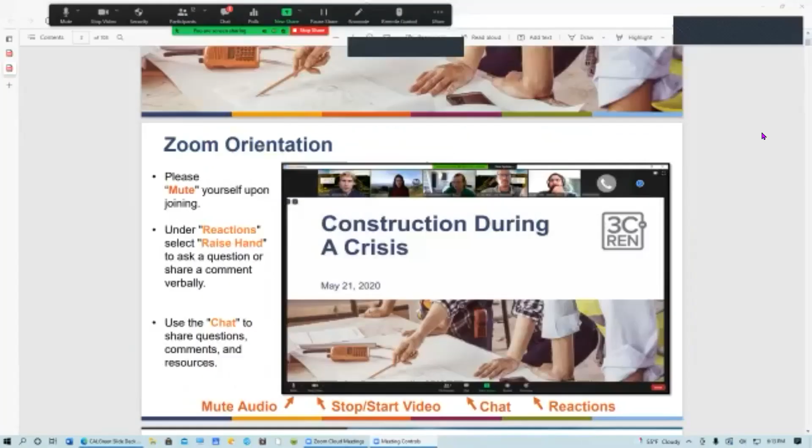So this is a slideshow like we've been looking at. 3C REN does this one also, and it's not very long. We may not look at much of it, but next semester a lot of this stuff's more relevant. Green building has building performance in it, but not everything uses building performance or building science. Some of the green buildings have other things in it.

What I want to do is show you this slide, Title 24. Title 24 is just a legislative number or title for a bill that was passed, so they just call it 24 to keep track of it. It's the building code, so whenever someone says Title 24, they really just mean the California Building Code. It's got 12 parts to it.

It's got an administrative code, which only a total masochist would read. It's got the building code, which is where you find out your stair-step riser limits and everything to do with building. It's got an electrical code for the electricians, everything to do with electrical. HVAC would be in mechanical code, plumbing code, and then they've always had an energy code.

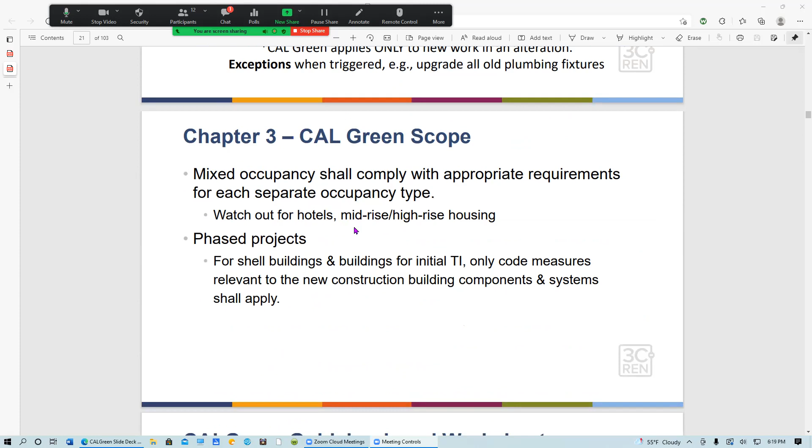They have a lot of things. The government's obsessed with trying to get everybody to understand this. One way they could help is to write decent code books, which they've never been able to do. But they try to make up for that by having all these reference things, like we looked at some for the... what do you call it... air changes, right? Minimum ventilation values. Yeah.

So, okay, why am I echoing in there? Is somebody not muted and it's playing through their speakers? Might be me. Sorry, okay.

So in this part 11 of the code on green building, they have planning and design. We'll just run through this real quick because I'm going to take more time with this next semester. They have energy efficiency, obviously, but they also have water efficiency, right? Because in California, that's a huge issue.

And then they have material conservation and resource efficiency, which is also a great thing to have. And then they have environmental quality, which is indoor and outdoor air quality mostly, but it could be water quality too. So this slideshow kind of tells you what's in each of these chapters or divisions.

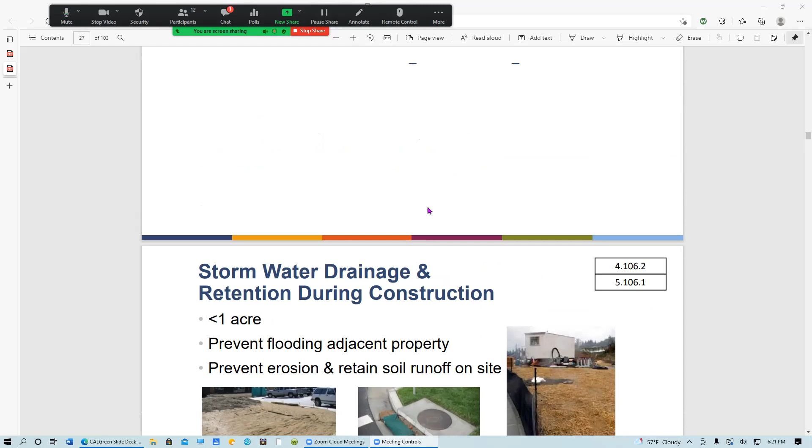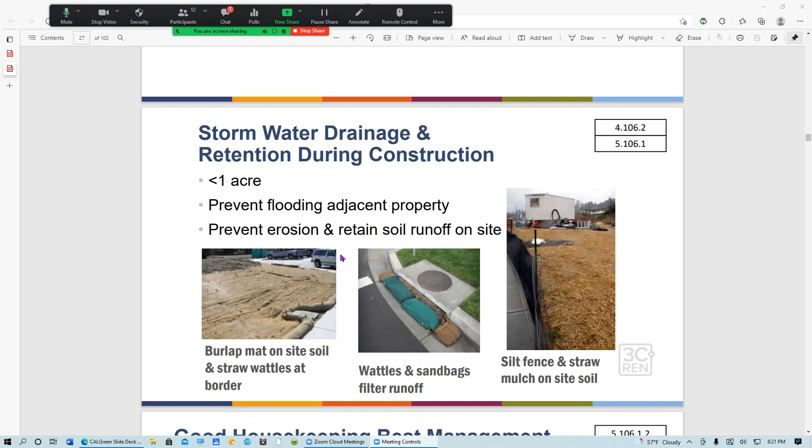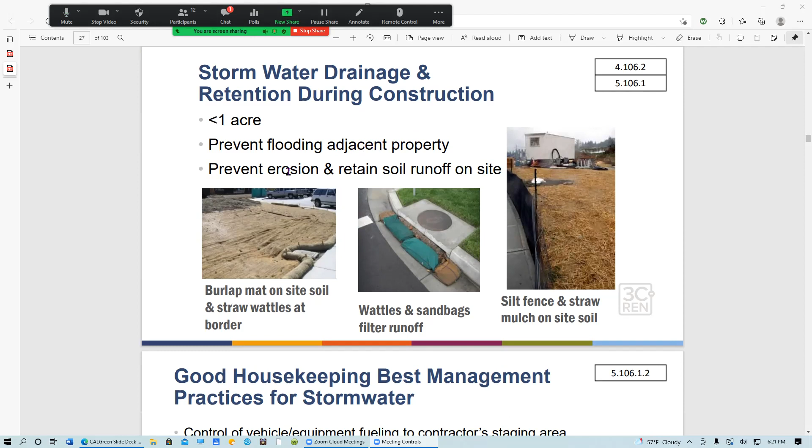Planning and design is just talking about best practices, things like stormwater drainage and retention during construction. Now, we've talked about that in this class minimally. We had a water management unit that we did. And the place you'd go to find out the government restrictions on that, and how they want you to manage water - first of all, we don't have a lot of water, so they don't want you to let it just go everywhere.

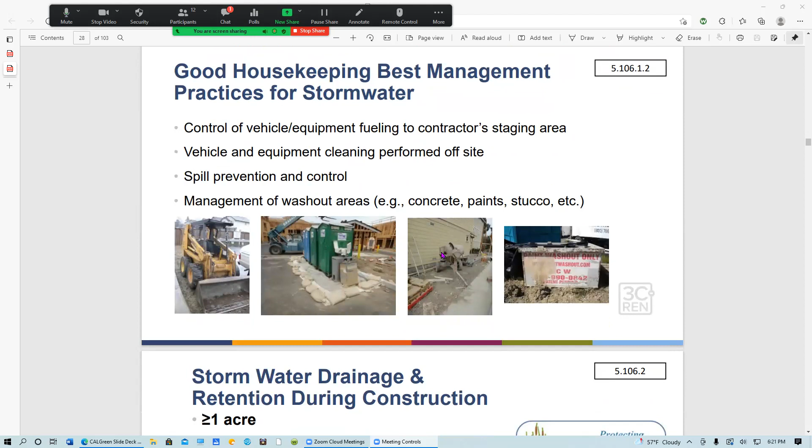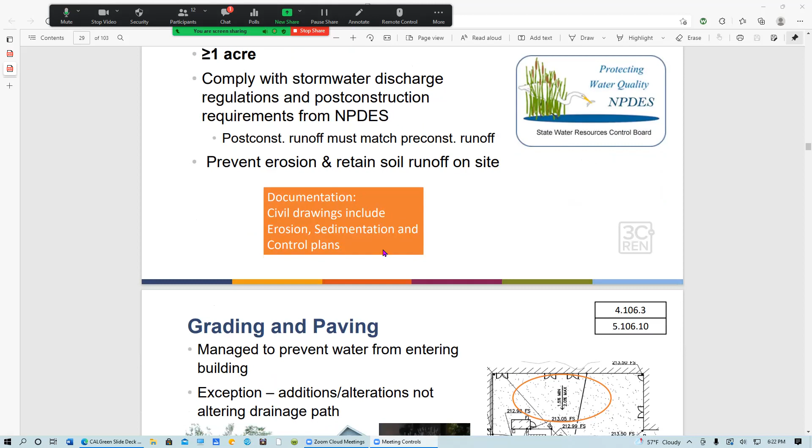And then they want you to prevent erosion, obviously, so they have things for that. We won't go into the details, I'm just giving you an overview here. Stormwater practices for dealing with stormwater, stormwater during construction, that's an interesting thing. And there's temporary things you need to do if you live in an area that's going to rain, and construction takes months, sometimes years to do.

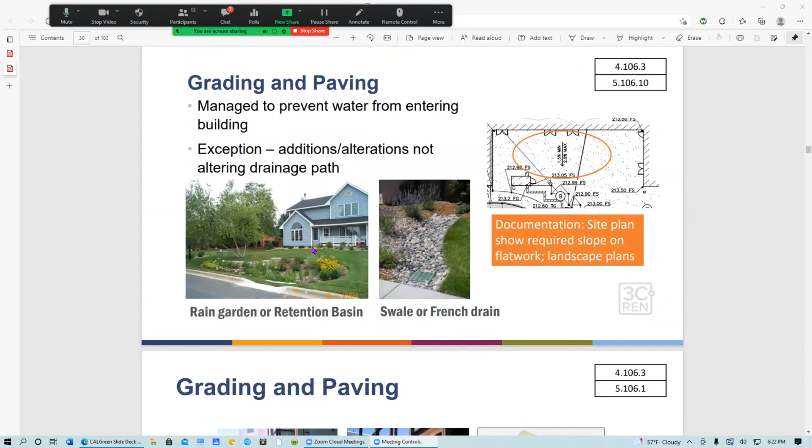So you want to make sure you're prepared when the heavy rain season comes in your area. Grading and paving - like wattles? Yeah, like wattles and all kinds of stuff, temporary swales, sandbags, all kinds of stuff. These are more permanent structures to have in your yards. And we've talked about this a little bit, rain gardens and swales and French drains. And then there's, of course, grading and paving. There's things to know about.

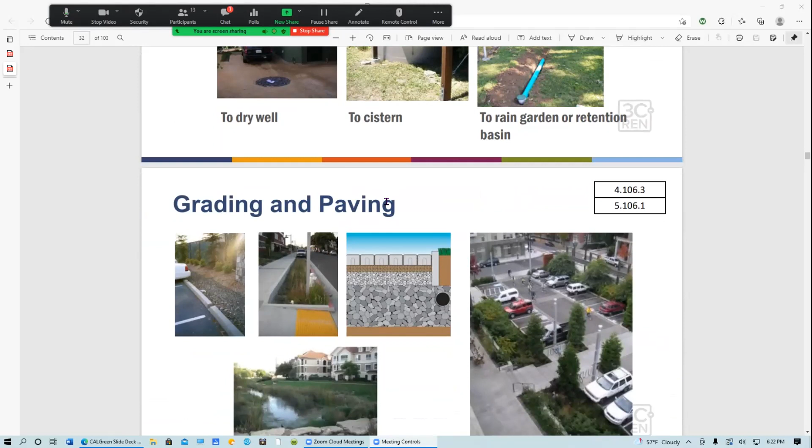So conserving water - a lot of grading and paving now is to conserve water, get it down to the water table.

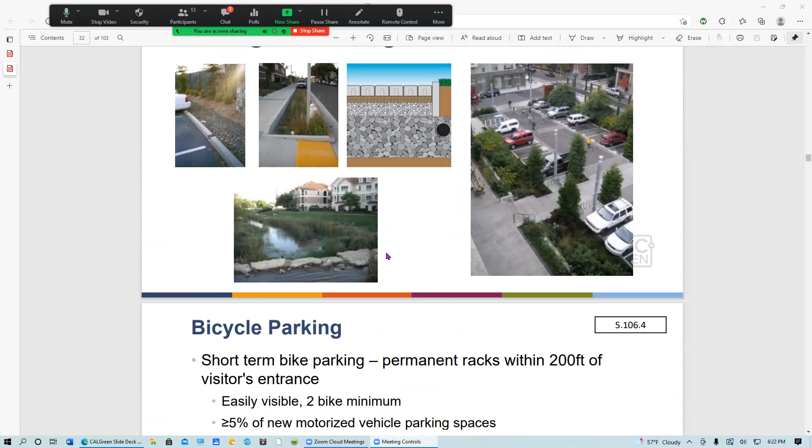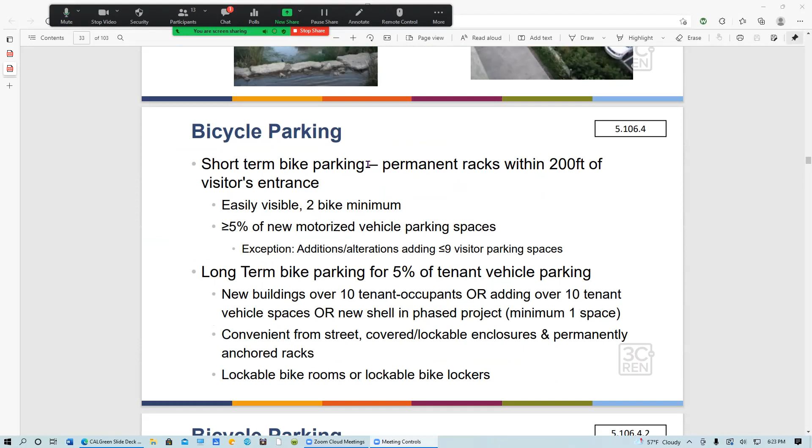Bicycle parking, there's a new category, huh? So there actually are laws about bike parking, because we're trying to promote bicycle riding. So if you don't have places where people can lock up and protect their bikes, they won't do it.

So the county, across from the courthouse there where the county building is, they have a screened-in area, it's like 15 feet high, and it's got wire fencing on all sides, and every county person has a key, or it goes back and forth between combination and key, and they can go in there and park their bike. Because my electric bike, for instance, is pretty expensive, and I don't want someone ripping it off, so I wouldn't ride it to work unless I could be certain it was secure. When I taught at UCSB and rode it, I'd bring it into my office, down the hallway and into my office.

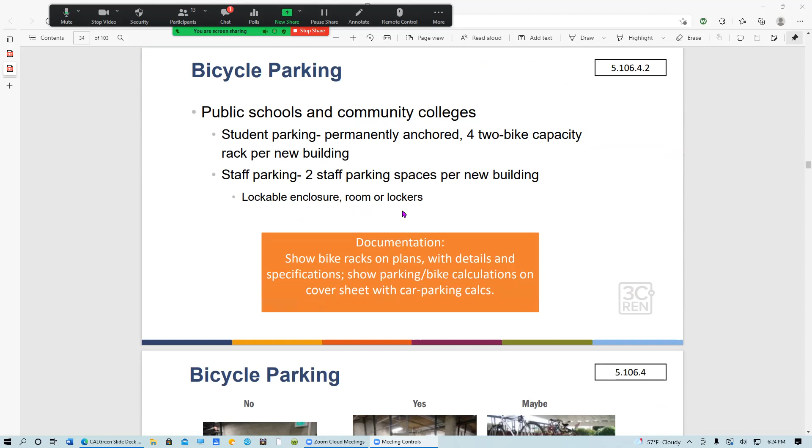But now they're saying you have to actually have places for people, so that's great, so they have to have parking. Santa Barbara City College has parking, and they even have fix-it shops, little sheds to help you if your bike gets broken. So here's kind of a screened-in thing like I have at the county. They have racks that have locks on them.

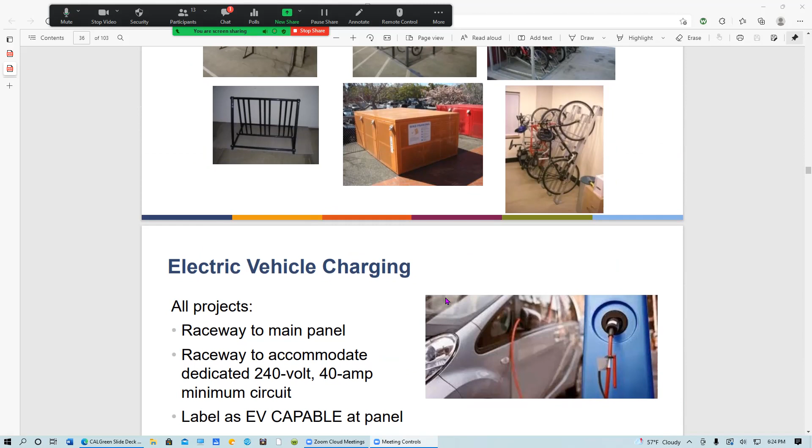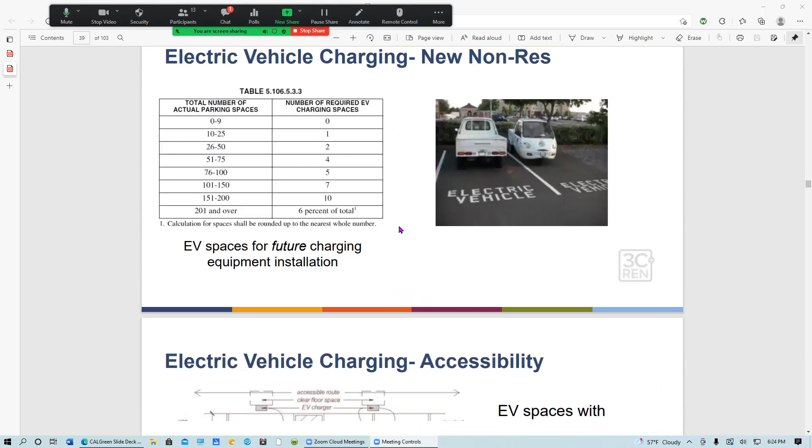So that's important, and same with electric vehicle charging. We're trying to encourage people to ride bikes for many reasons, but vehicles are to cut down on fossil fuels, so we've got to make sure we have a lot of these EV charging things. So this is the kind of thing that's in that green, CalGreen section of the code.

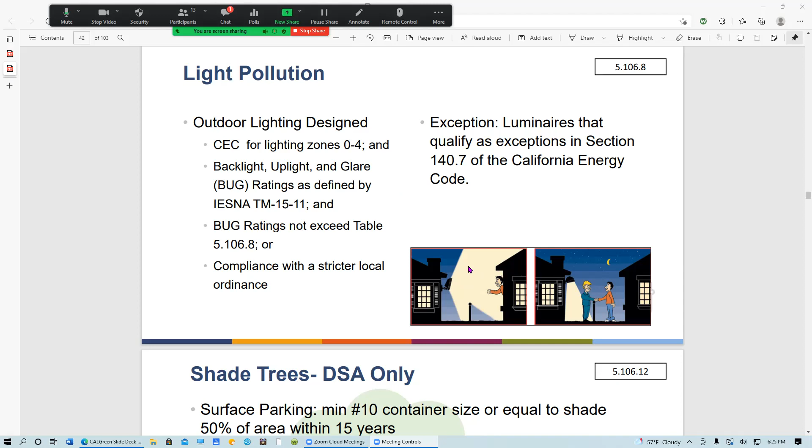So energy efficiency must comply with Part 6. So that's what they have to say about that, which is what I thought - why duplicate it? But water efficiency is a good thing.

So you guys will have this slideshow on this recording. You might want to keep some of those recordings that have fact sheets, information on them, because if you want to get the current code requirements for water and things, this is a really concise way to find that stuff - much better than the code.

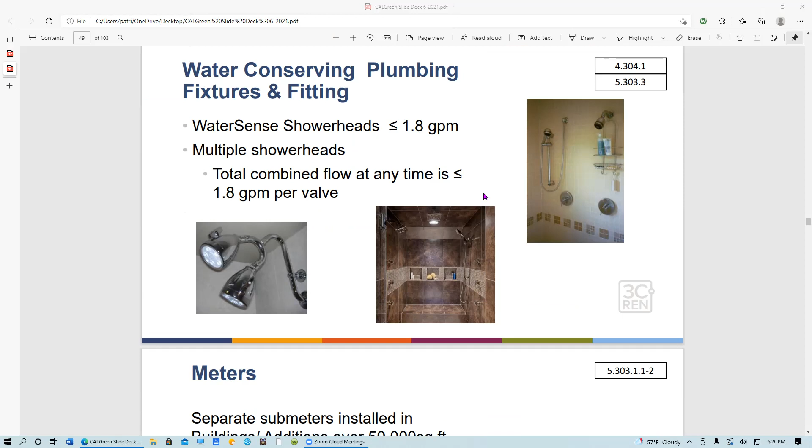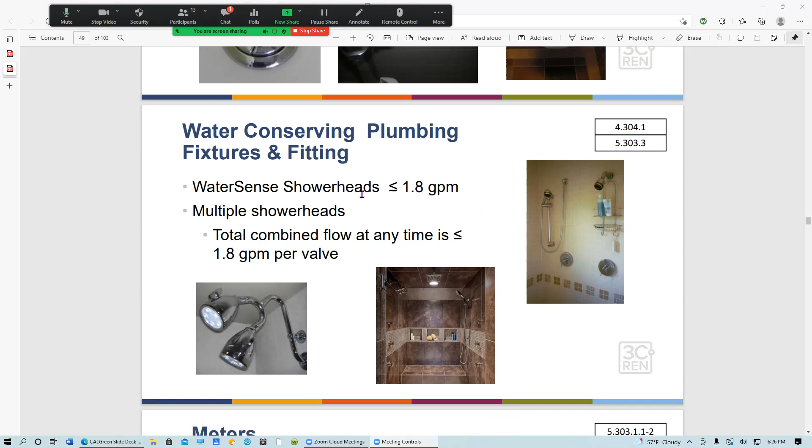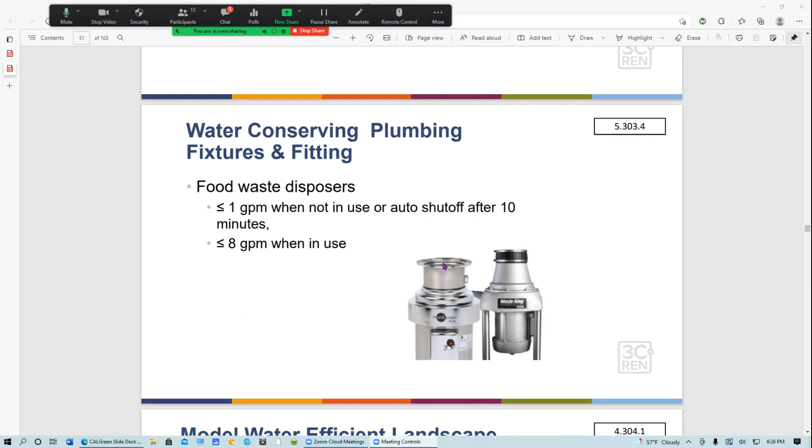Yeah, the 3C-REN group has done a lot of work, but they're actually boring to listen to because they go on and you don't want to know a lot about every area. With a slideshow, you can just whip through things and not get overwhelmed looking for what you want. Look at this, interesting - they have guidelines for food waste disposers. They have to have an auto shut off after 10 minutes, otherwise they'll burn the engine, maybe cause a fire.

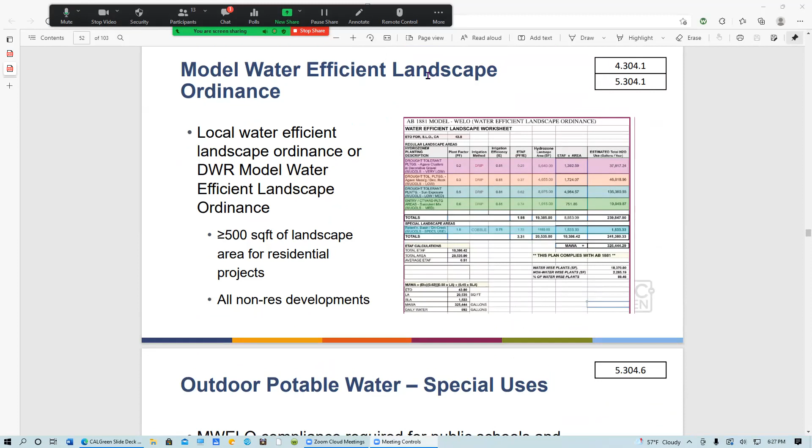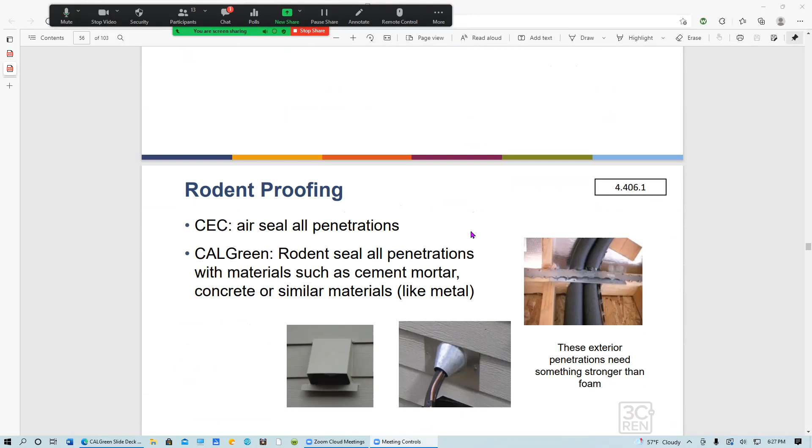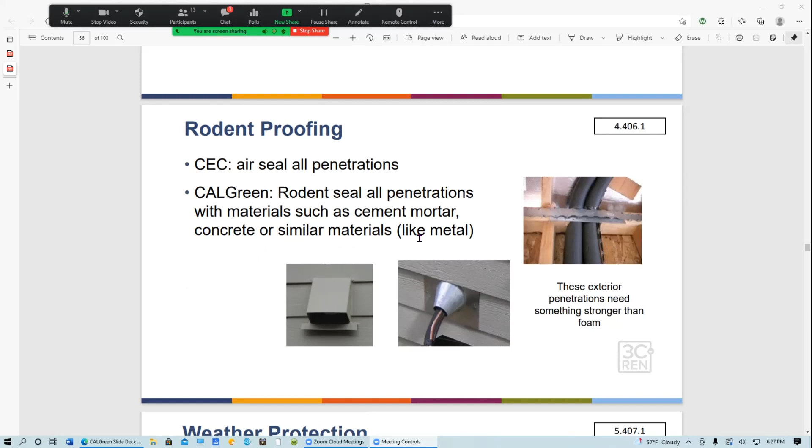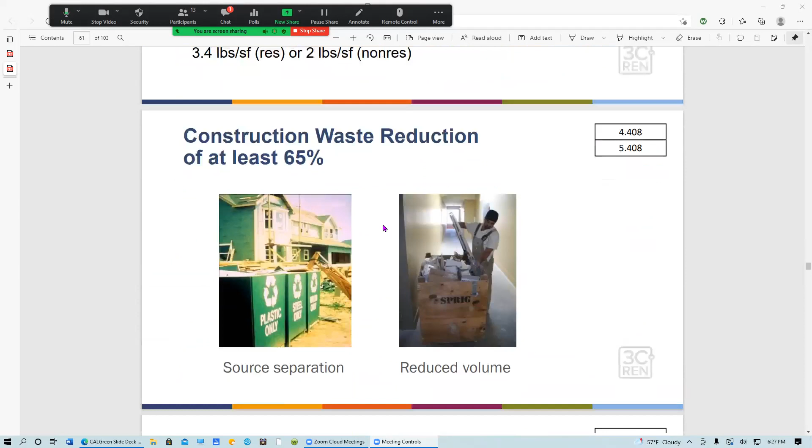So, model water efficient landscape ordinance - outdoor potable water, recycled water. Okay, resource efficiency. Well, that's funny - material conservation and resource. So are they considering rodents a resource to be protected? No, it's what the rodents eat, right? So weather protection, moisture control, construction waste - at least 65%.

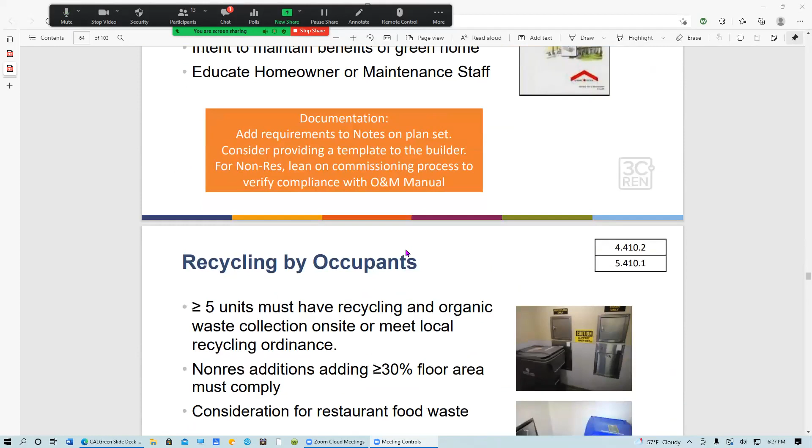Operation and maintenance manual. At final inspection of a house now, you have to have a homeowner's maintenance and operation manual, because we've got so much building science, building performance equipment in houses now, that if you sell a house, the next person has to know how to deal with all that stuff. So you have to have a manual, and it has to have at least 10 subjects, because otherwise you lose these green home benefits. Like a car or truck manual, but for a house.

Yeah, exactly. And I've felt all along for the last 10 years they've recommended that people should build a room or a separate section in their house - there's a lot of stuff in a house people have now. We've got a lot more electronics than we used to, and there could be quirky things about the electrical system. How many times have you gone into your electrical panel in the garage and seen something marked for bedroom, turned it off, and it turns off the kitchen instead? So there's just a lot of things to keep track of.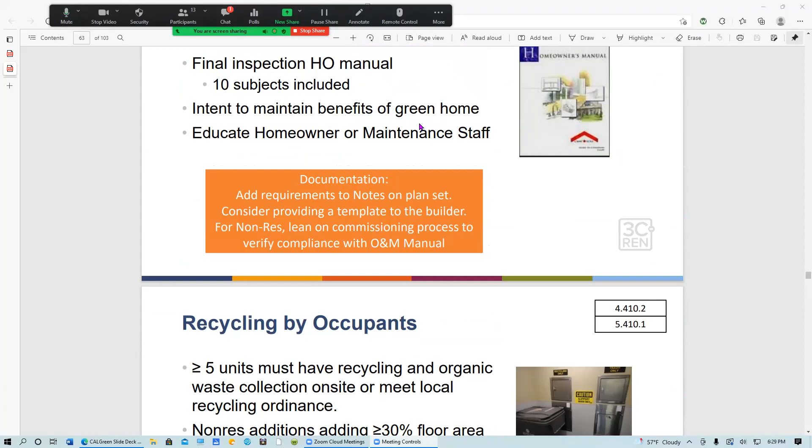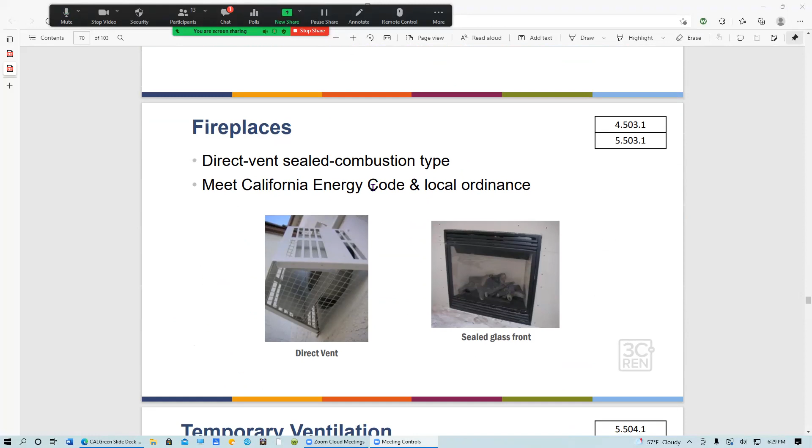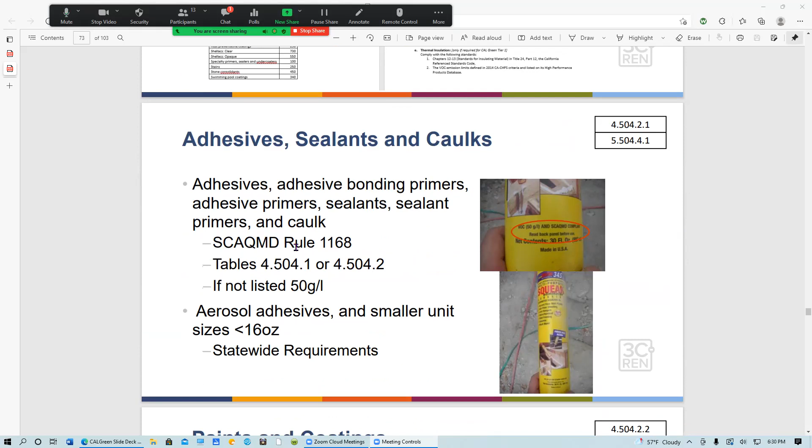Recycling, environmental quality. Oh yeah, okay. So this is like combustion air. Yeah, adhesives - this is like VOCs. And a list of the minimum requirements for maximum VOC and toxins and various things.

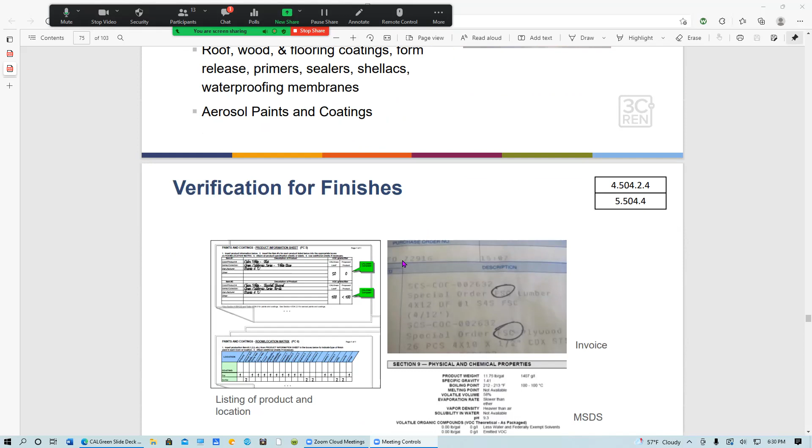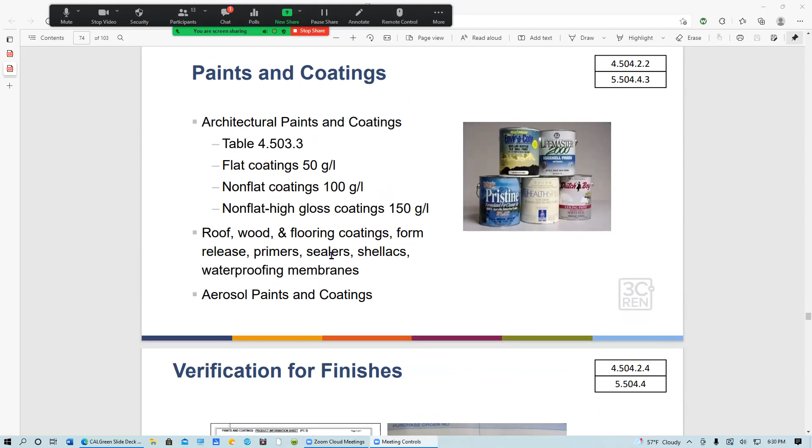Carpets - they got regulations on carpets. It used to be they made carpets with the cheapest materials, so they'd have cheap carpets because a lot of people can't afford expensive carpets. This was when everybody was using carpets. But the poor people who couldn't afford good carpets had to breathe all that - what's the stuff? Come on, you guys, help me out. The stuff that's in carpets, it's got to be listed here somewhere.

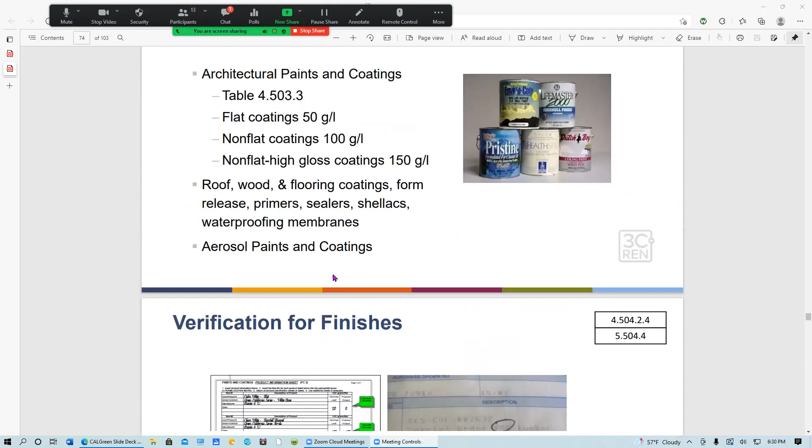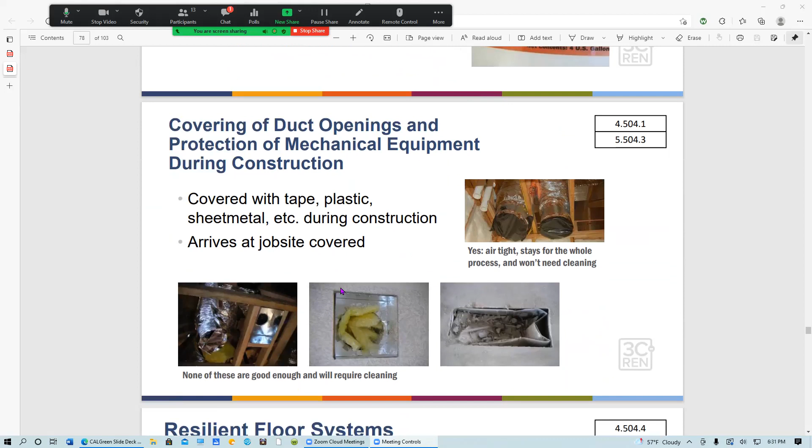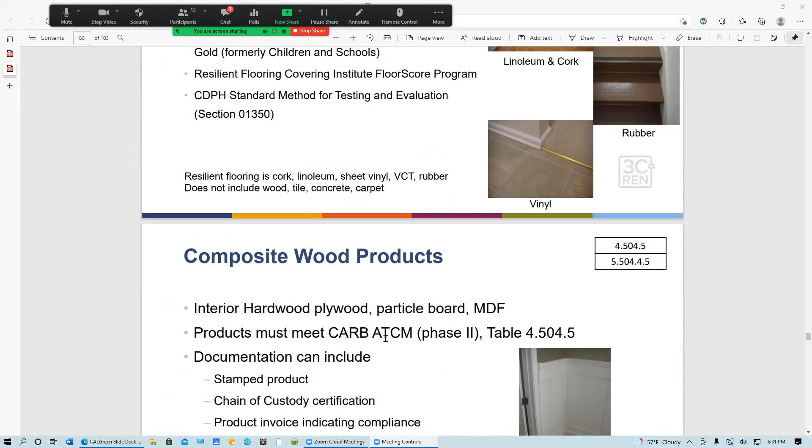It ends in like azine or something. No, it's... I'm just drawing a blank. It'll come to me in a second. It should be listed on here because it's one of the things with the glue they have and stuff. That's funny, it's not listed anywhere.

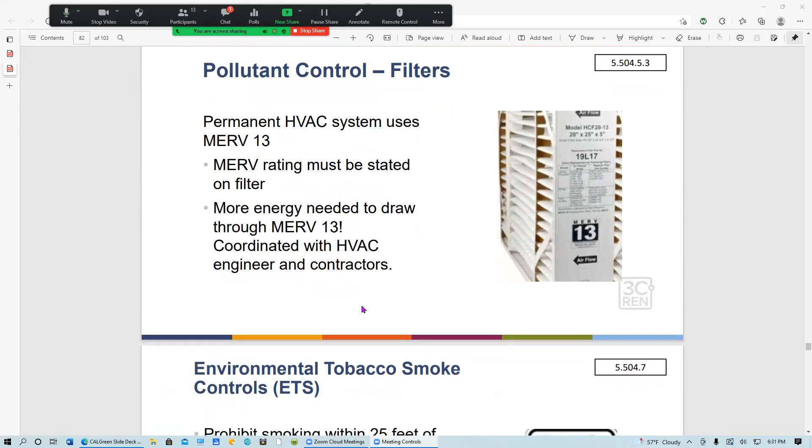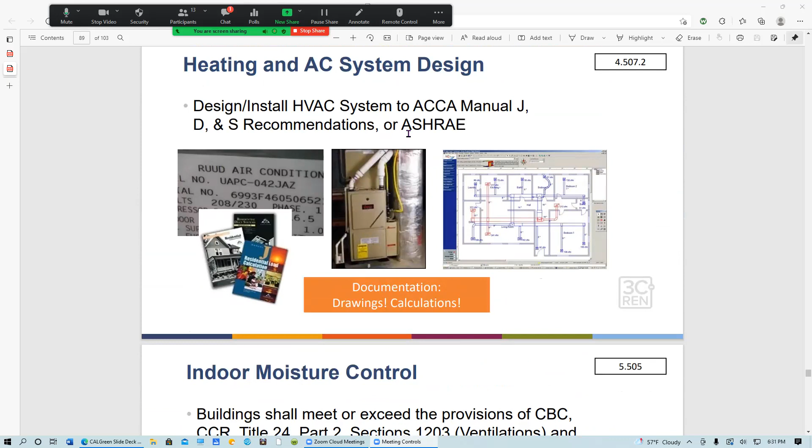So look at this, goes on and on, right? So it doesn't deal with energy, but it does deal with some electronics because you have to have ventilation and exhaust. Are you talking about tooling? Or the glue - is it like toluene or something? No, I looked it up, that's one of them. Yeah, but it's the thing that used to be in the fiber board that people use.

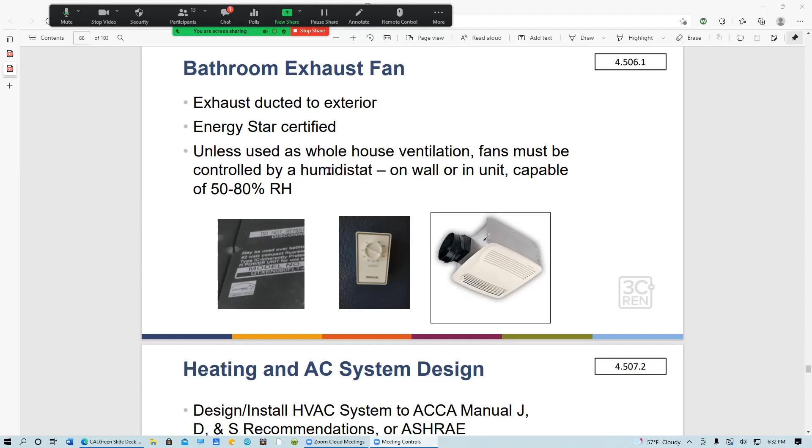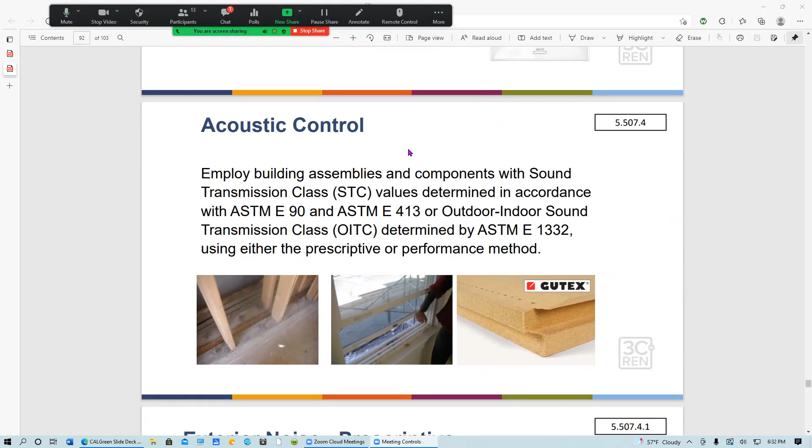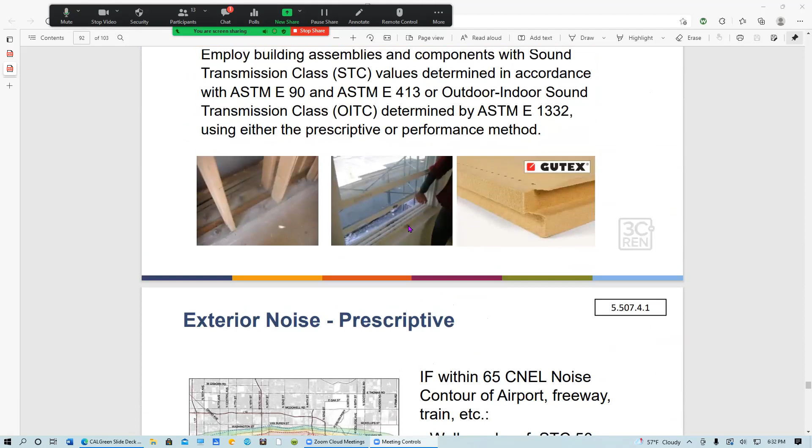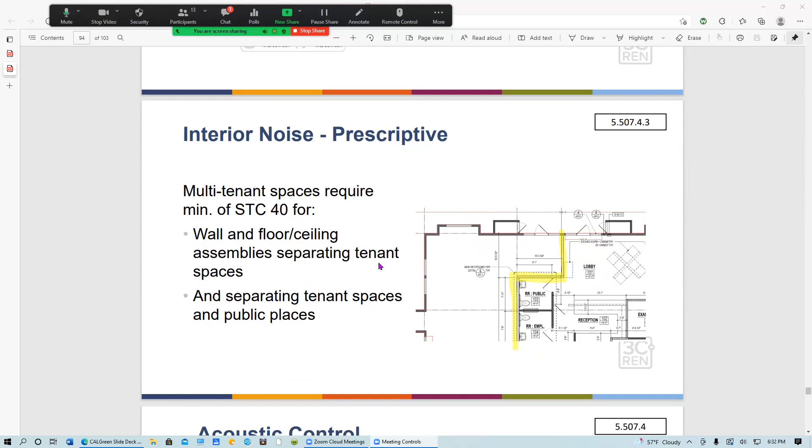Is it benzene? No, it's a real common name - you'll laugh when I get to it. But I appreciate you trying. Everybody else knows it, they're just spaced out like me. You're not asking about formaldehyde, are you? I am, yes. Oh, thank you - formaldehyde. Oh shit, yeah. Hey listen, don't ever think it's a stupid question, just throw it out there because you're probably right. Yeah, formaldehyde. It's funny they didn't mention it in all the toxic and VOC talk here, but it's usually the first thing they mention. And it hasn't gone away - they've gone to the better formaldehyde, not the urea, but the other one. But it's still not great.

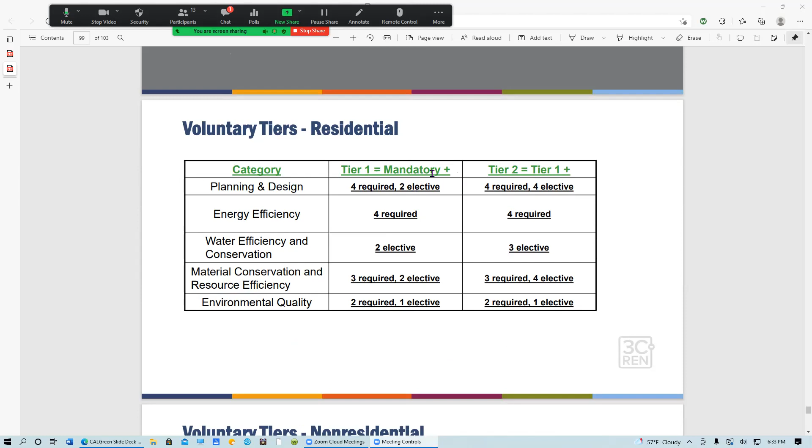And then voluntary tiers, there's credit for certain programs, like if you're doing a LEED house or a Build It Green, which we'll look at a little bit tonight, or Energy Star, you can get credit for some of these voluntary requirements or possibilities.

Is a reach code like across the street from the Rose Gardens where all the houses have to be the same color? Yeah, that's probably a reach code, but it could also be something like a difference in the maximum allowance for a stair riser. Like they've come down, the state's like, I don't know, 7.25, they change it, I don't know. And local, they could say, well, no, we want it 7, we want it even less. So you'd have to know that, right? You have to know if it's different.

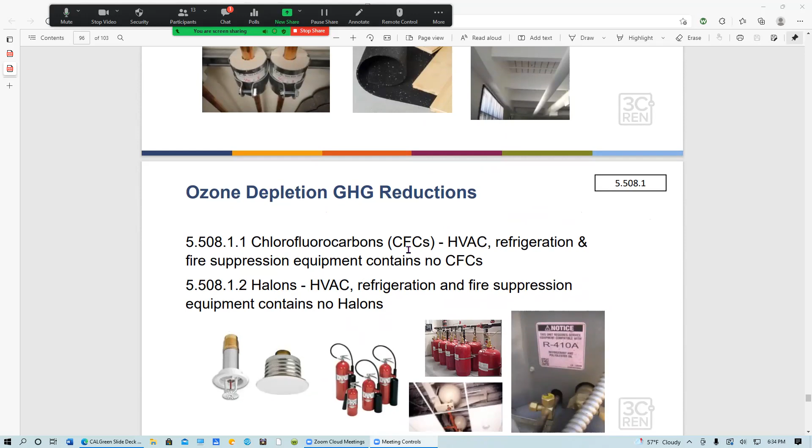Okay, so we're going to get out of that. We're going to talk a lot more about those things in the next class. Just wanted to show you that in that chapter or section of Part 11 of the building code, Title 24, is all green building. So it's a more bureaucratic way of listing all these requirements. These people have put it into a fairly easy to read slideshow, so it's great.

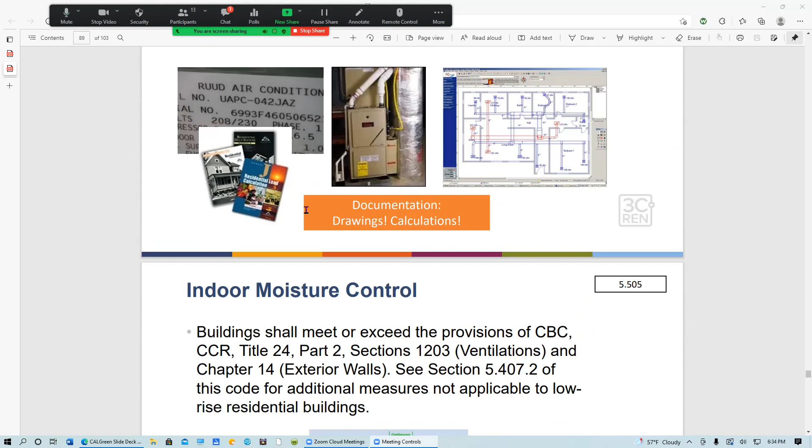But we are going to look at the actual Part 6 of the code, which is energy efficiency, and then you'll see what the code looks like. I mean, some of you already know, but...

So where would that be? Oh yeah, okay, so I need to go to... Google. Give me a second to get this thing. Okay, do you see this California Energy Commission? Okay, so this is on the internet, and if I can get rid of this thing. It's energy.ca.gov. That's pretty simple, right? So write that down, energy.ca.gov.

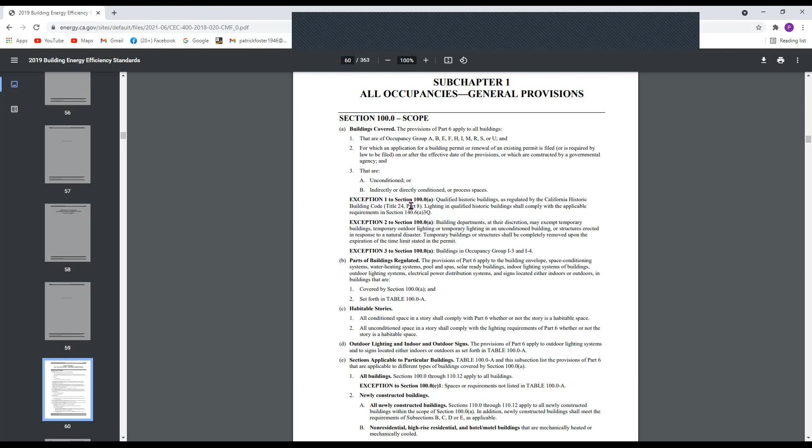What the building code does—and a lot of you have looked at these codes over the years—is it has a section on buildings covered, telling you what kind of buildings, and then an exception section. Often what you want is under one of these exceptions. In fact, almost inevitably, if you read the regular building code's construction part first, it doesn't make sense and gives you wrong information, because the exceptions are usually the larger, more applicable area. So when you go to an exception, it says, don't listen to any of this, pay attention to this instead. That's how it gets confusing.

So this is the really general stuff—it's got some definitions, habitable stories, a little bit on outdoor lighting and signs. This is kind of a grab-all section.

So it says for low-rise residential buildings, these are the compliance approaches. Compliance means to comply to the code, law, or standard. Everybody know that word compliance? You have to comply to this standard. It's a very bureaucratic term, but it's used, so you got to know it. There are two approaches for complying with the code in Part 6, the energy one we're looking at.

It says mandatory measures. This isn't organized well - as a writer and an English teacher, I can't believe they can't do better. Anyway, these are the two approaches: performance approach, which I talked about, and prescriptive is the other one. Why can't I remember? Because the word's not an ordinary word. So these are your choices.

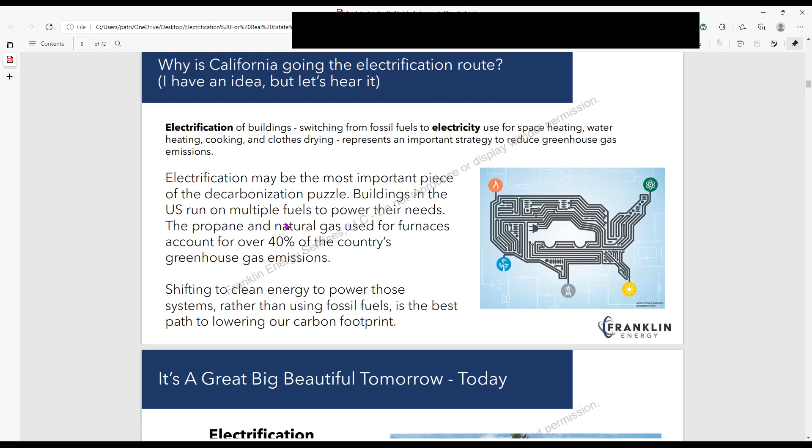Electrification may be the most important piece of the decarbonization puzzle. Buildings in the US run on multiple fuels to power their needs. The propane and natural gas used for furnaces account for over 40% of the country's greenhouse gas emissions. So if we get rid of propane and natural gas, that's getting rid of almost half of our greenhouse gas emissions—a pretty incredible number. So you can see why they're really hot to do this. We don't have a lot of time. This decade is the decade to get this stuff done.

We've been doing this since 1973, after the first OPEC oil embargo. Most of you weren't alive, but OPEC, an organization of oil producing states mostly in the Middle East, decided to flex its strength. They realized they had power as the main suppliers of oil. So we had an embargo, we didn't get any oil, and we couldn't make gasoline. The gasoline crisis at the pump was unbelievable. People had to wait for hours to get gas, they couldn't get it, they had to go on alternate days. It was pretty hairy.

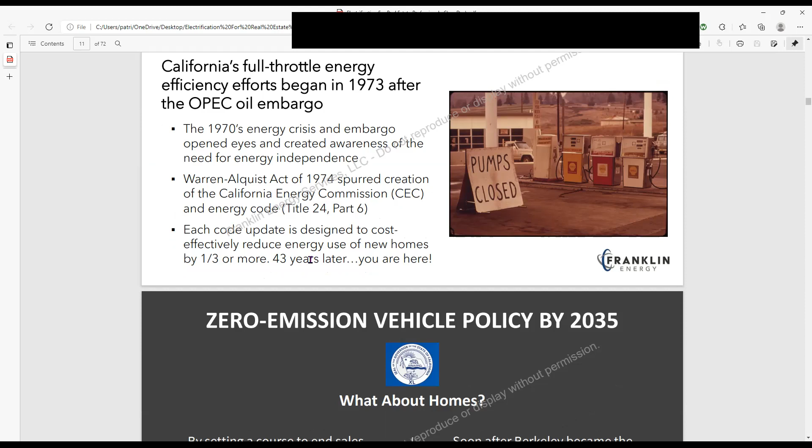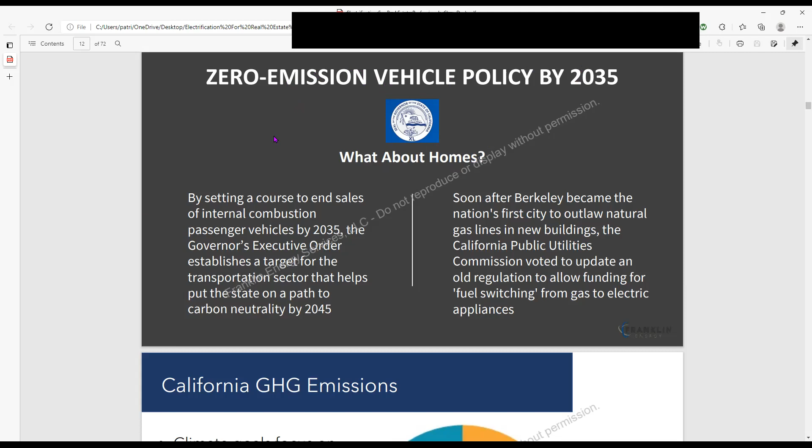Zero emission vehicle policy by 2035. The state's getting ready to declare that vehicles cannot have greenhouse gas emissions after 2035. That's 14 years away. Not very long. And what about homes?

These slides are great because they have current numbers. Greenhouse gases: buildings 26%, that's a quarter of the total. Cars 37%. Cow farts 9%, I wonder if goats burp and fart too. And industry 27%.

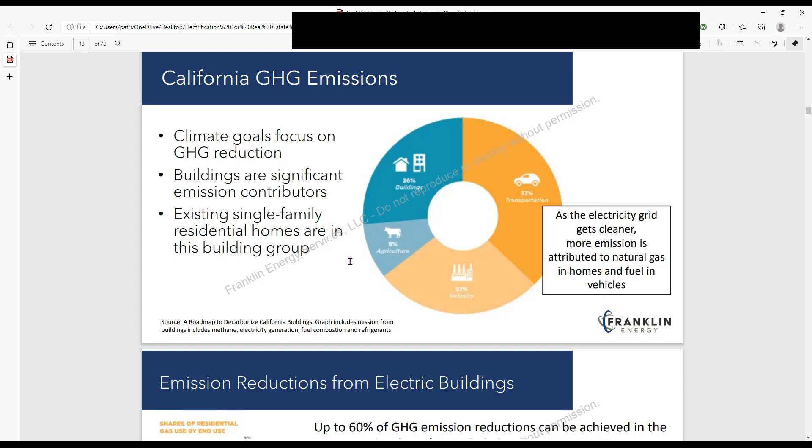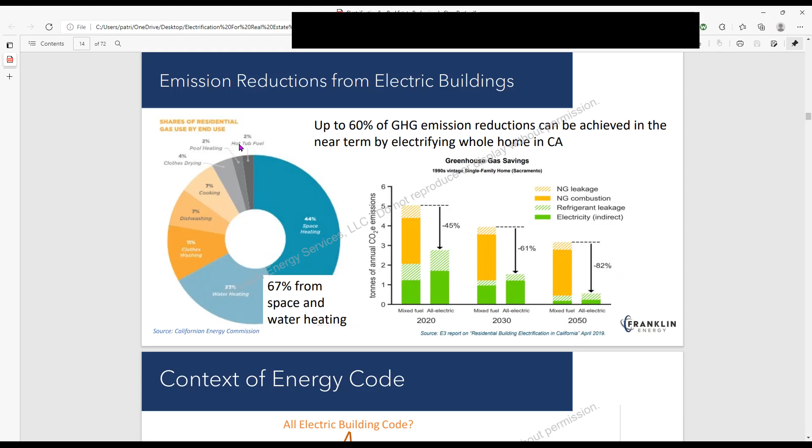Hot tub fuel equals pool heating. There's some kind of social comment there coming on, but we'll skip it for now.

All electric building code, is it coming in 2022 or 2025? One of these will happen, and no new houses will be able to be run on anything other than electric. So there it is, the writing's on the wall.

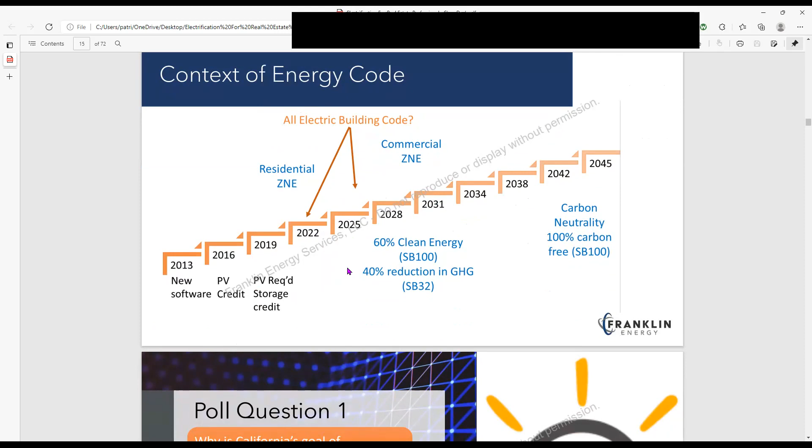Why is it important? The biggest thing is stopping global warming. Far and away, that's enough right now to make all of this worthwhile. But they're adding all kinds of other things, like it's healthier, and we'll look at that real quick.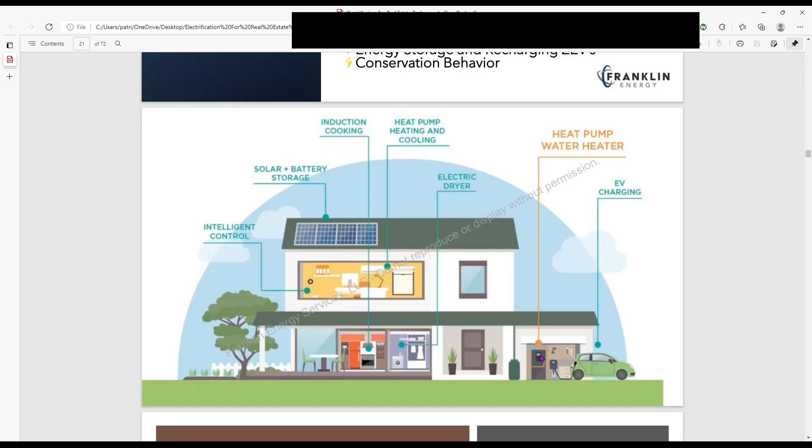These are the things you can replace: induction cooking, that's an electrical cooking stove, solar and battery storage, controls so you control your lighting when you're not using it, sensors and stuff, electric dryer for clothes drying, heat pump for heating and cooling, heat pump water heater, and charging your electrical vehicle. That's what the house of the future will look like.

Many houses, I'm trying to get my own house there. I'm old, so I've got a little bit of money, not a lot, to start changing some of this. I can't afford that storage, like I said, 20,000, Christ. But little by little I'm doing it, and next semester I'll probably bring you guys out here and show you all the stuff I've done so you can see it firsthand.

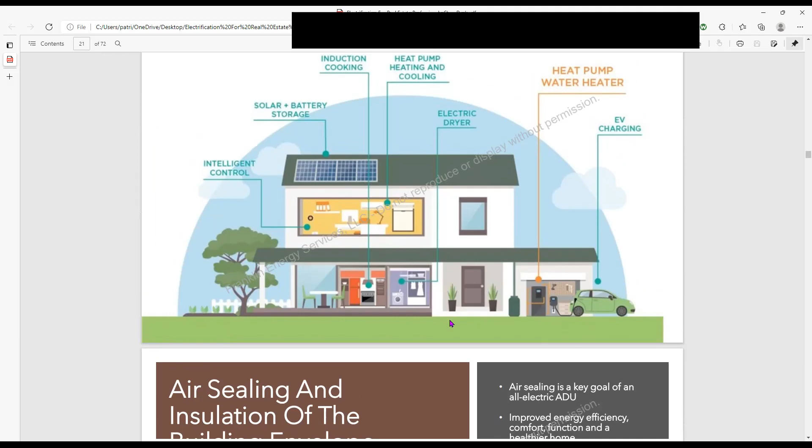Anybody here have an electric car yet? Or a hybrid even? Yeah, you're all too young and poor. I hope they come down in price. Be great if they make the little quarter-ton pickup electrical. I think they have some already, but I don't think they're as cheap as they need to be. We need to get the Taliban to drive around in electrical Japanese trucks, you know?

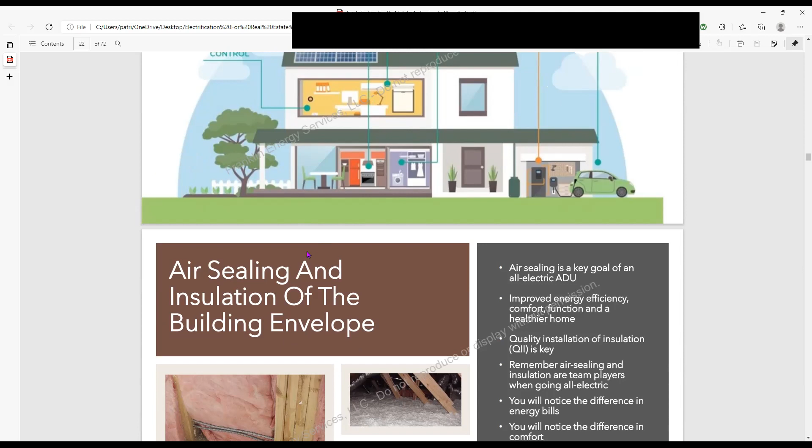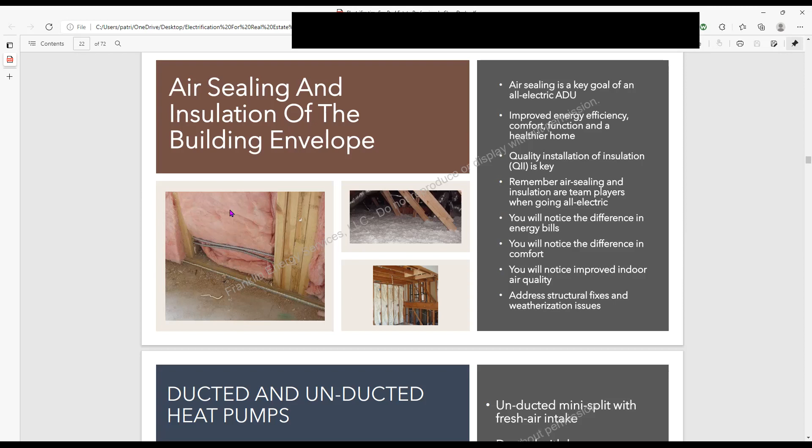Obviously air sealing and insulation are huge things, and we spent the whole course on that. Hey, what's wrong with this fiberglass here, everybody? It's not smushed in right, it's squished in and it doesn't separate and go to both sides of the wires, so you've got this whole back that's open until it comes to the front, which is somewhere in here. It's just not going to work, big hole there.

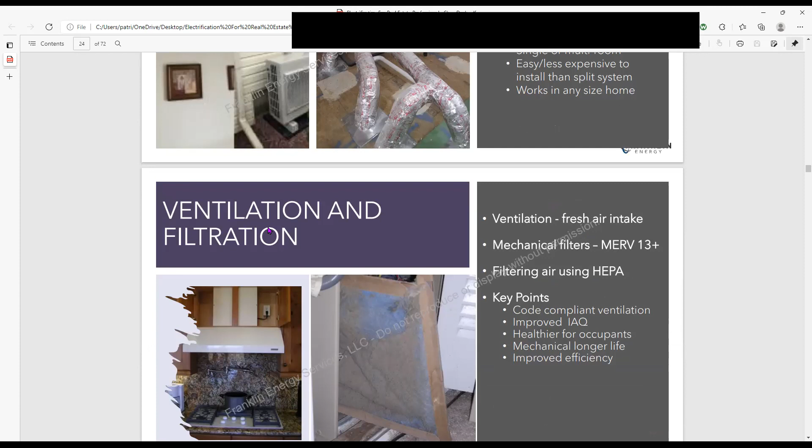Ducted and unducted heat pumps, so heat pumps are big. Ventilation and filtration, we've talked about that. Heat pump water heating, induction cooking, power generation, batteries, zero emission vehicles.

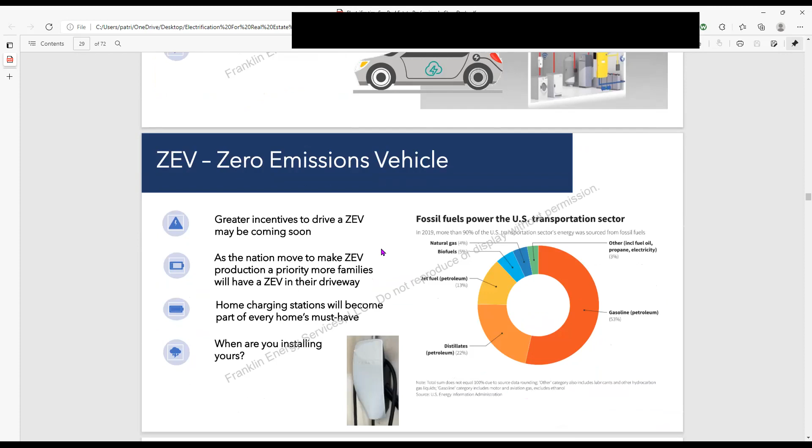What is the most important electrical upgrade you think your clients will want in their home? Replacement heat pump, AC and heater, that's pretty simple and not that expensive. Induction cooktops, a little more expensive but still reasonable, if you need a new stove then that switch isn't bad. Water heater, photovoltaic system, that's probably the most expensive.

Health and safety benefits, we don't need to go through that because we've talked about indoor air quality quite a bit. But here's a survey - they do a lot of surveys about what clients want who are buying homes, and they want healthy homes. They don't want them so healthy that they have to spend a lot of money.

The great thing is, though, it used to be that people with some kind of disease or condition where they were really sensitive to toxins of various kinds just had to gut it out in their homes. But now we can make homes that deal with almost any kind of medical condition, which is really great because it allows those people to have houses like the rest of us that are nurturing and not poisoning. I think that's been a great thing.

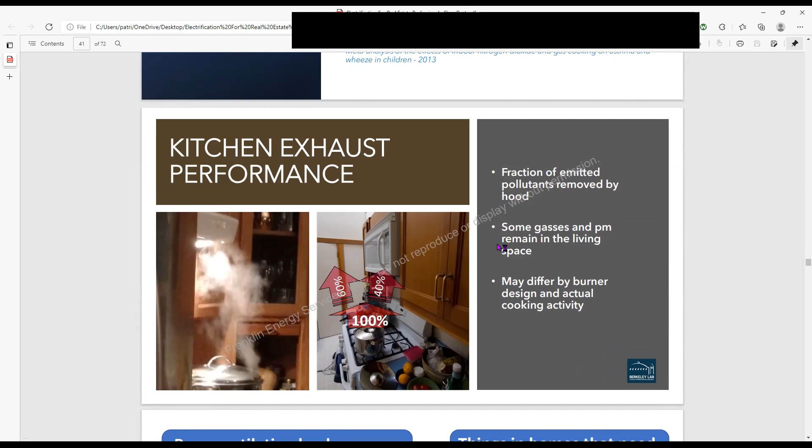Kitchen exhaust - the one problem with exhausting really well from the kitchen is that if you live in an Italian or Hispanic family and you've got great smells from your food drifting into the house, that'll be sucked up by the exhaust system, which is too bad.

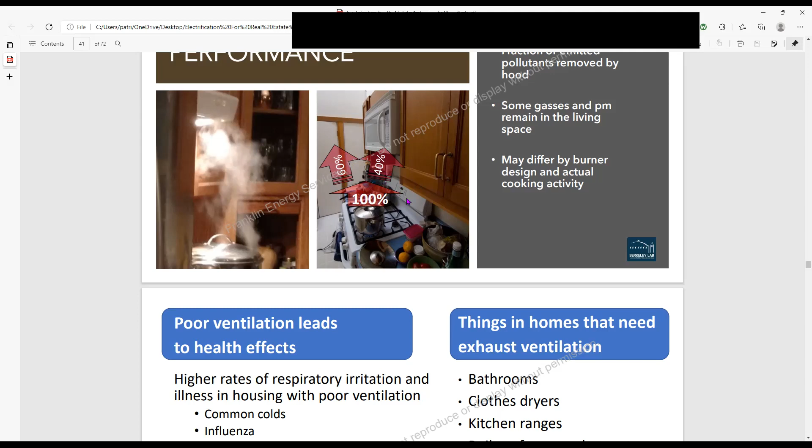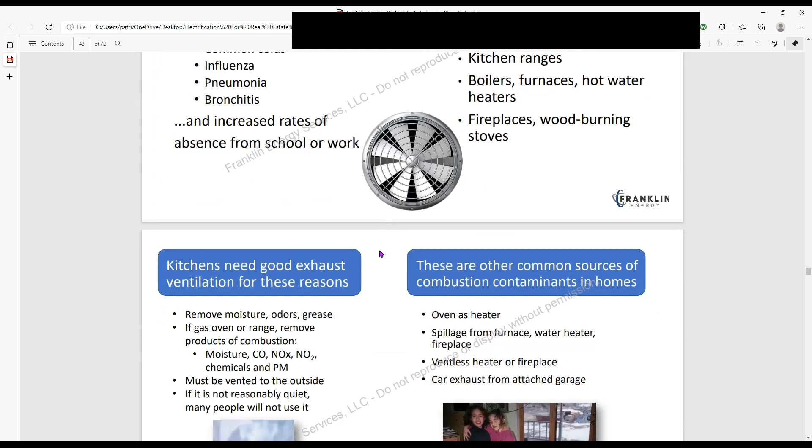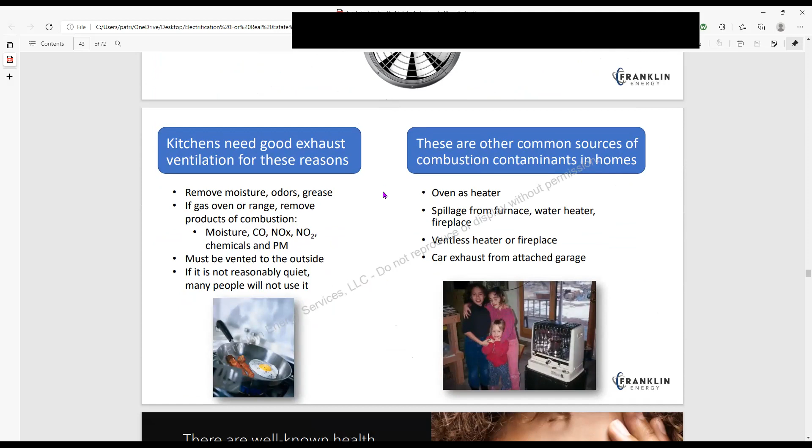I know a lot of you are Hispanic in this class, but do we have any Italian families represented? Those homes smell really good too. Actually, Asian homes smell great too - when I was a kid, we had a Chinese family across the street, and whenever I'd go in their house, God, it smelled great. Always something cooking.

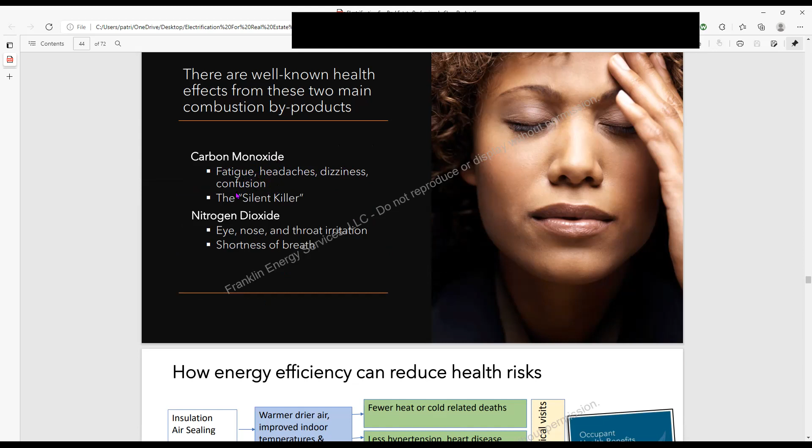Okay, carbon monoxide - see if you have any of these symptoms: headache, dizziness, confusion. Well, that could just be your normal self. But nitrogen dioxide, yeah.

So a lot of health risks are obviated by more sustainable home construction techniques. It's true. All right, I think we're good. So that's all I got.

It's only 8 o'clock, we're doing good. Any last minute questions? You guys never have questions - Jack has questions all throughout, and Alex sometimes, and Lewis. But questions are good.